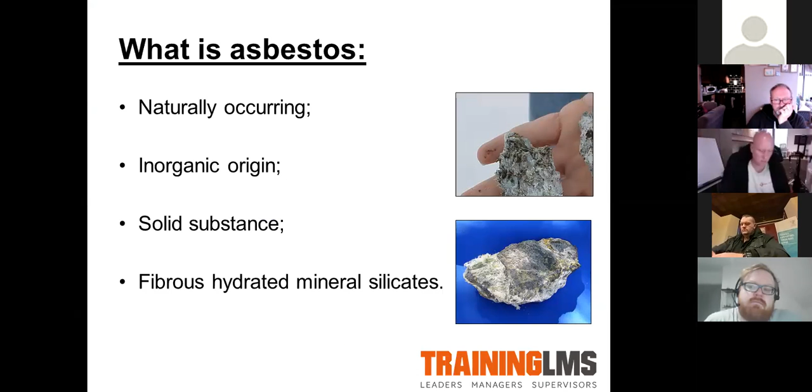So just to make a start, what is asbestos? Asbestos is basically a naturally occurring mineral that forms in riverbeds, etc., and over years of metamorphic pressure turns into a rock. So in the rock, in the veins of the rock, as we call it, this is where the asbestos forms. There are 2 different types of fiber. Again, we'll look at those in a wee second.

But as I said, it forms in rock and it's then extracted from that rock and made into the various products that we know of today. So they say there's anywhere between 3,500 and 4,000 products that it was made into. So again, we're going to look at a lot of the familiar ones.

You'll see a few unfamiliar ones as we go through the session. So these are just a few photos of basically the asbestos forming in its rock. Okay, so its definition by Google, one second, I'll just move this camera. So it's a heat-resistant fibrous silicate mineral that can be woven into fabrics used in fire-resistant and insulating materials. So two of the key words there would be fire-resistant and insulating, two of its key properties. We will again look at the properties in a second or so.

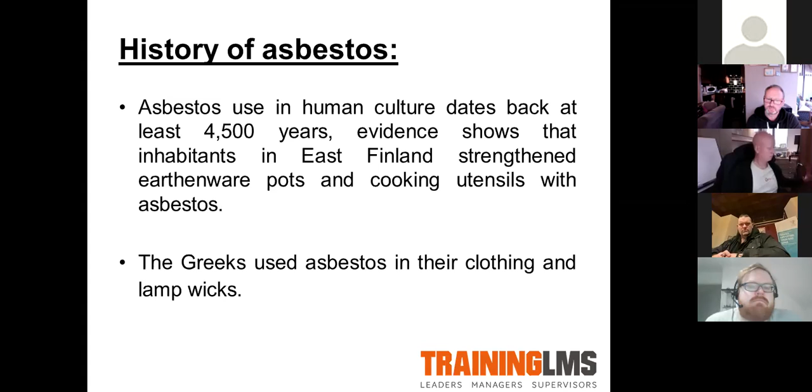A brief history, how it was used, etc. It was used by the Finnish. They were using it 4,500 years ago to strengthen pots and cooking utensils. So again, one of the key features of asbestos is strength, tensile strength. So the Finnish were using it for their pots, cooking utensils, etc. The Greeks used it in their clothing and lamp wicks. In medieval times, it was used extensively as insulation in suits of armor.

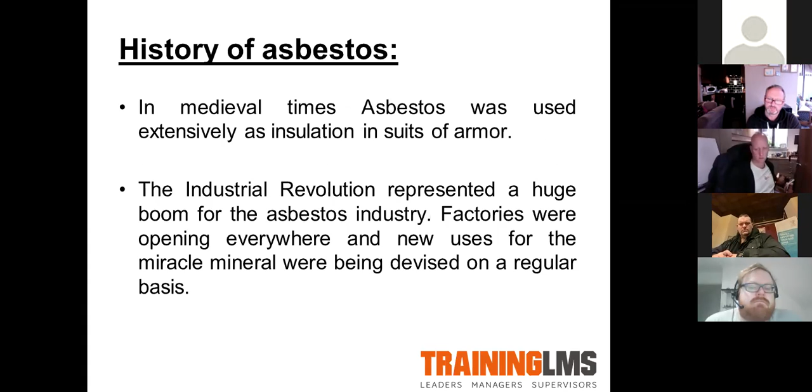And the Industrial Revolution represented a huge boom for the industry. Factories were opening everywhere, and new uses for the miracle mineral were being devised on a regular basis. So as we said, up to 3,500 to 4,000 products it was made into. It wasn't until the late 1880s that asbestos was mined commercially in Canada, closely followed by Russia and Africa. So three of the main countries responsible for taking it out of the ground were the Canadians, the Russians, and Africa. Russians are still taking it out of the ground. We'll briefly touch on that in a wee second as well.

So the Russians are still one of the major operations in taking chrysotile white asbestos out of the ground in 2020. In the UK, the commercial use of asbestos began around the end of the 19th century, and it increased rapidly after World War II. So obviously there was a lot of destruction, etc. after the war. It was a readily available mineral product, and it was cheap. Cheap being probably the key word as to why it was used. It was readily available and it was very, very cheap.

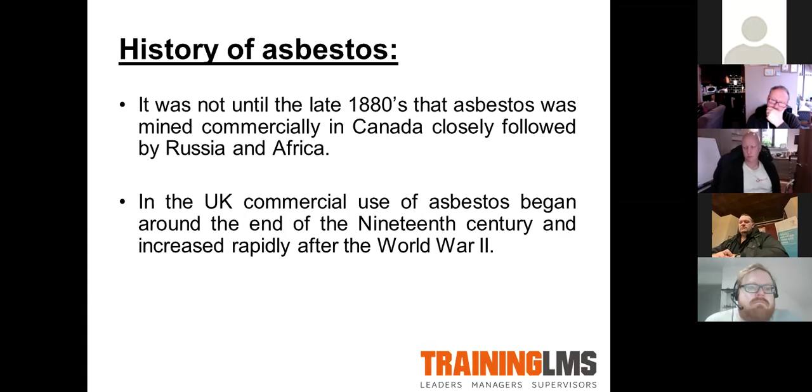The greatest use of asbestos was from around the 50s to the 80s, especially in system-built housing. So any of you guys that are in Northern Ireland Housing Executive, etc., the guys over in England, social housing. A lot of those houses were constructed using asbestos. And today in 2020, even when we're out surveying, there is still a hell of a lot of it in those properties. A lot of people seem to think that in 2020 now, the majority of it is gone. Definitely not. There's still a lot of it out there being managed, removed, etc. on a daily basis.

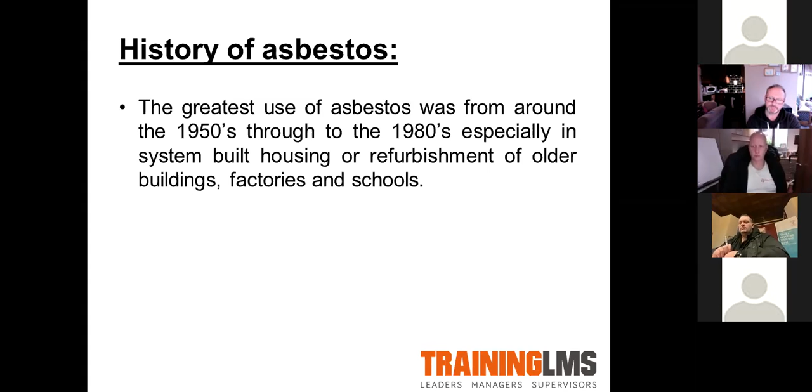Other places it was likely to be installed would have been older buildings, factories and schools. Any government funded building, there's usually a lot of it in there. Yeah, and older factories and schools. So I'm sure you have had some experience in any of those areas with regards to asbestos. So in terms of time frame, that 30-year period of the 50s through to the 80s was when the majority of it was installed. In 85 and 99, which we'll touch on in a while, there were bans brought in in the UK, so the installation of it severely reduced. So basically any building, factory, school, whatever you're working in that was constructed between that period, there's a strong likelihood that asbestos was used.

So here are three types: crocidolite, the top one, amosite and chrysotile. So we'll start with crocidolite. It is our blue type. Again, you don't need to write any of this down yet. If you want, you can write it down in a second. There was 50,000 tons of crocidolite installed, mainly as thermal and sprayed insulations. So sprayed insulations to undersides of roofs, etc., factories, pipe lagging, all of that kind of stuff.

500,000 tons of amosite, which was our brown asbestos, mainly as insulating board, so AIB, thermal and also sprayed insulations. As you can see, there's a significantly larger amount of chrysotile installed, so it would have been the most popular type of asbestos installed in the UK. So you can see 2.7 million tons of it, mainly in cement products, the likes of your roof sheets, your gutters, your downpipes, all of those things. So large kind of areas to fill, hence why there was a lot more of it used. So there was 2.7 million tons of chrysotile.

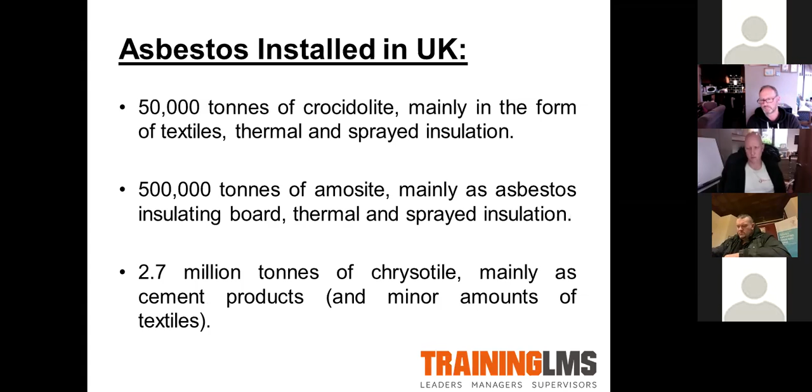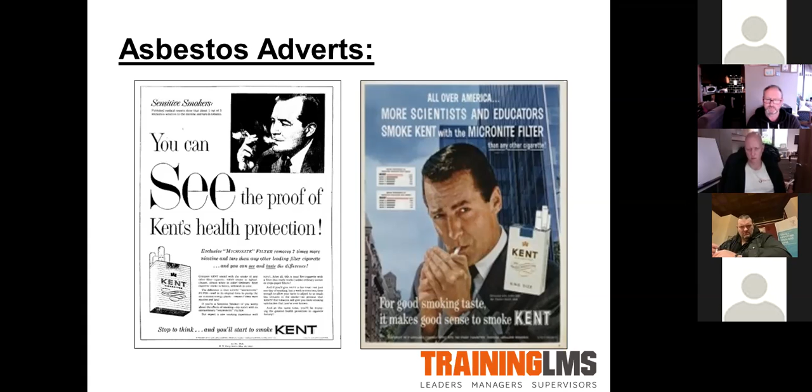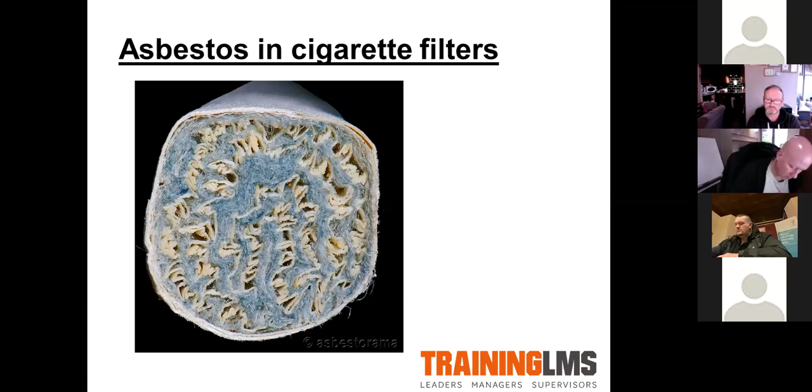So this was Kent Cigarettes, who promoted their cigarette as a healthier cigarette to smoke. The reason they stated that was because of this. In their filter, they basically used blue asbestos, the most dangerous of the three, Crocidolite, as a filtering agent. That filtering agent was there to take out your bad tar, nicotine, whatever other dirty chemicals are in cigarettes. So little did they know they were basically breathing in a class 1 carcinogen in blue asbestos. So thankfully those aren't around today.

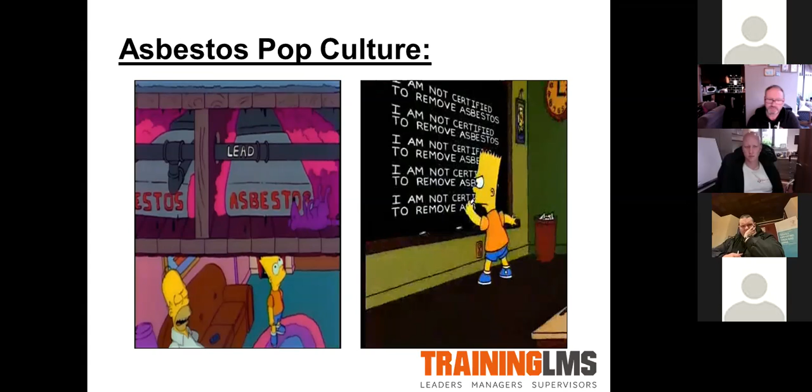So the three main types of asbestos, guys, if you want to write this down, this is probably one of the most important things you can take away, the names and the types. So feel free to make notes if you want, or you don't have to, obviously. Number one is Chrysotile. So that is our white asbestos. That is the one that we referred to at the start as being the most popular, the most likely that you're going to come up against.

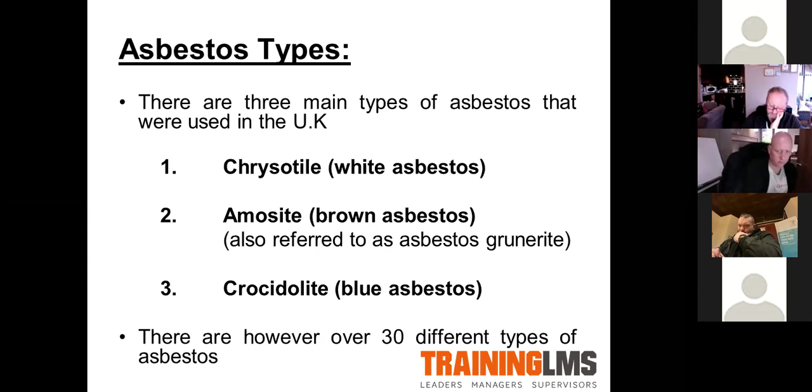Chrysotile also with the likes of your roof sheets. I know a lot of you guys are contractors, so I'm sure you've come up against corrugated roof sheets before, gutters, downpipes. This would be the main type of asbestos in those.

The reason being, it's an amphibole fiber, so therefore it's a straight fiber like our amosite. The difference with our crocidolite, and hence why it is the most dangerous of the three, is due to its makeup. I can maybe show you in a drawing, apologies for my drawing. So I kind of hold it up like so. So straight fibers, and on the end of them they have got barbs. So think of it nearly like a fishing hook.

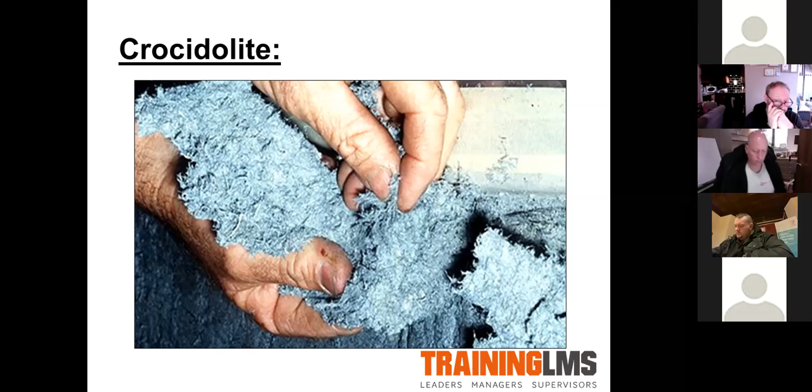When those are breathed in, they're basically clamping on to the lining of your lungs and the inside of your lungs, and it's virtually impossible for your body to expel them. So in terms of risk, that is why our crocidolite is considered the most dangerous. It is usually highly concentrated in its products, and with the makeup of that fiber, it's very, very dangerous once inhaled.

So moving on to our properties. We touched on a few at the start. We talked about fire resistance. We also talked about cost. So the main reason why it was used, guys, was thermal insulation. It was really good for thermal insulation. It's stable at high temperatures, used a lot of the time for fire protection. Also considered a good electrical insulator. It's moisture retardant. It was resistant to chemical attack. Does not degrade easily. It's got good acoustic properties, and it also had frictional resistance.

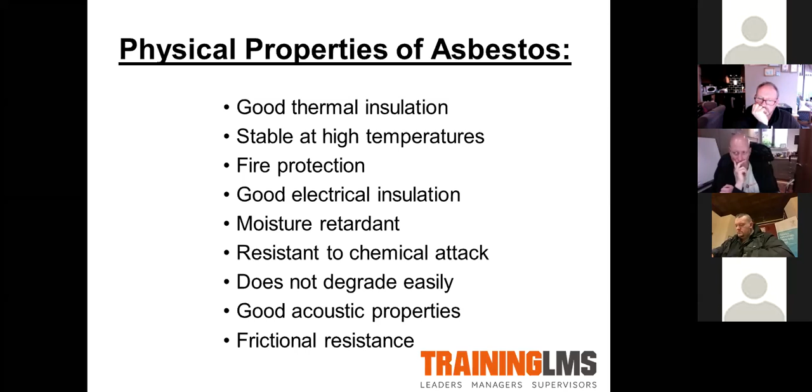So a lot of properties there, a lot of things that it was useful for. Hence why it used to be called the miracle mineral. Basically, it ticked a lot of boxes in terms of properties. One that hasn't appeared on that, and I've already touched on it, was cost. So like most things, even today in 2020, a lot of things come down to cost. So that would have been predominantly the main reason. But in terms of actual physical properties, these were why it was used.

So ban dates, guys, we touched briefly on that as we were introducing. So our chrysotile was banned in 1999. The final ban date for chrysotile use within the UK was 1999. That was the last time that you could install asbestos. The amosite and crocidolite were banned first, so you can see 14 years before chrysotile. Due to risk, they prohibited the use of amosite and crocidolite first. So in 1985, you could no longer use that. Any property constructed between 85 and 99, in theory, should not have any of those installed.

Obviously, after 1999, there should be no asbestos installed. There are some exceptions, guys. Just pay attention if you get a property that was constructed in 2000. Be sure to check that there is no asbestos in those buildings. The reason being, once it was banned in 1999, the government basically gave a one year grace period to get rid of all the previous stock that contractors had. So the odd, very, very small amount, the odd year 2000 property could have asbestos. But if you're ever asked when asbestos was banned, it was prohibited in 1999.

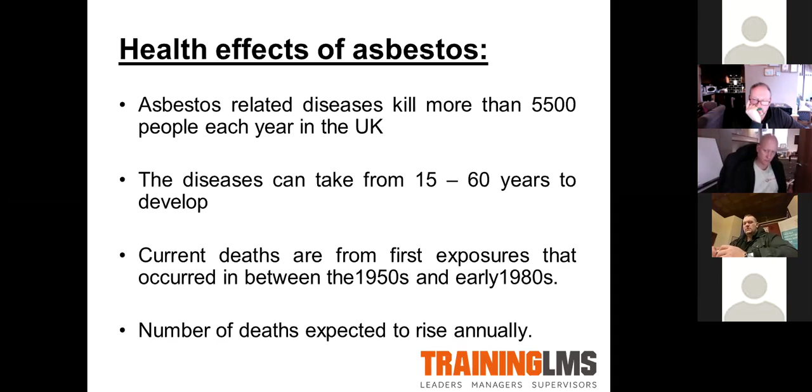So up to 2060, there's potentially going to be a rise of deaths. Hopefully, as we get towards that date, that number will start to come down, but there is expected to be an annual rise up until that date.

So who is at risk now? I'm sure you guys all come from different kinds of industries. Demo workers, construction workers, electricians, plumbers, gas fitters, plasterers, roofers. Basically what we're trying to say, anybody that is potentially going to disturb the fabric of a building. So I'm sure you guys all fall into one of those categories.

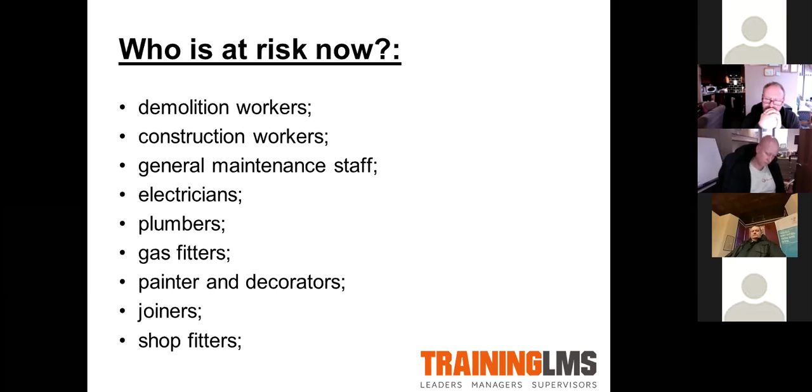Personally, I would say plumbers and electricians are probably most at risk, considering they're around boards, they're around pipework a lot of the time, they're in boiler rooms, they're in roof voids, etc. So in terms of risk, probably plumbers and electricians are high up on that list. But yeah, pretty much anybody that's potentially going to disturb the fabric of that building.

So asbestos fibers are a particular problem because of three things. We cannot with our eyes see an asbestos fiber floating around in the air. So the only way of detecting that is through regular air monitoring. So companies can go out with air monitoring pumps. They basically install pumps around your work area to ensure that that fiber is not spreading out of your controlled area.

The second one is the ability of fibers to split into finer fibers. So the ability of an asbestos fiber, if we say that's our asbestos fiber, it's always going to split down this way. So one fiber can potentially become 2, 4, 8, etc., and they have the ability to spread. So that's another problem we have with it.

And the third problem is its resistance to chemical attack. So once that is inhaled into your respiratory system, the chemicals within the body trying to dislodge those fibers are basically worthless, and that fiber will remain lodged in your body. So a lot of people will ask, is there anything you can do once it's inhaled? Unfortunately not. Once it's in there, it's basically lodged, and there's no way for the body to get rid of it.

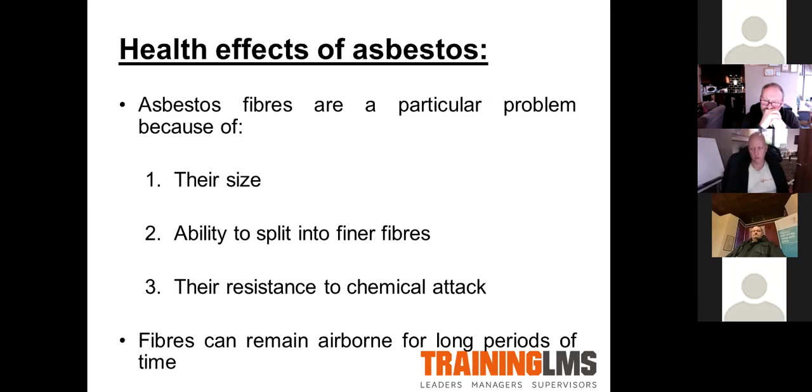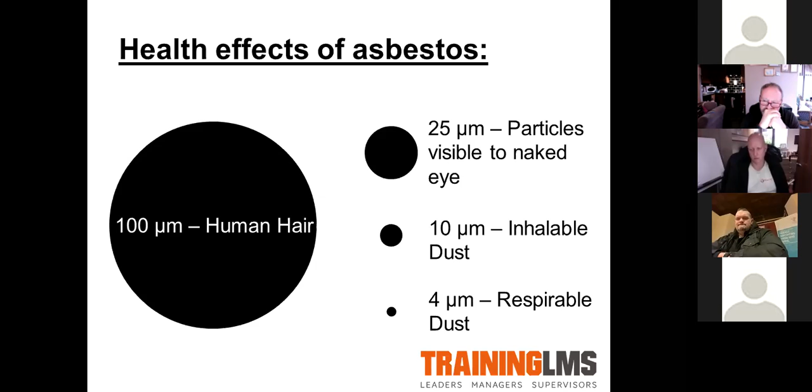So to give you an idea of how small this stuff is, a human hair, we say, is anywhere in and around 100 microns in size. So you're talking fractions of centimeters here. So to visualize that, respirable dust, which asbestos fiber comes into, is 4 microns in size. So basically there's no way of us detecting it in the air without air monitoring.

So if you're exposed to the likes of an AIB board that's broken or smashed, or sprayed insulation, versus the likes of a small piece of asbestos cement broken, there's quite a difference in terms of risk and how likely you are to pick up a disease from that. Obviously, with the licensable products, there's more concentration of asbestos, and usually the brown and the blue, the more dangerous type. So therefore, the likelihood of you picking up one of those diseases is a lot faster.

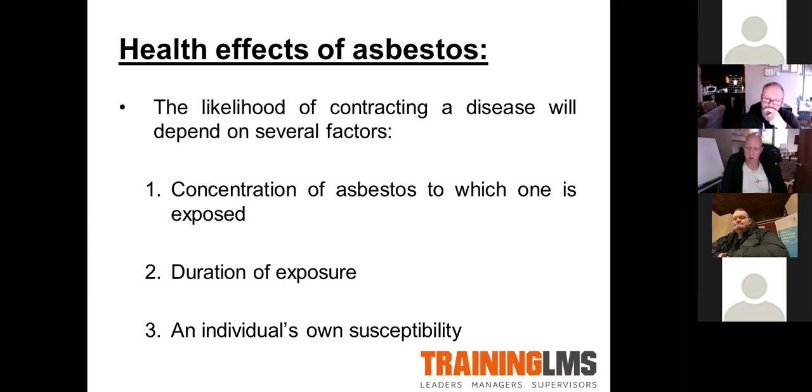The duration of exposure, so how often are you being exposed? Some people could be going into a workplace every day with asbestos in it. They don't realize that they're being exposed to a small amount every day. So that could factor in if you're being exposed on a daily basis, maybe every other day, versus maybe once a month. And then your individual immune system and body will also come into effect. So those 3 things combined, guys, will determine how quick you end up getting one of these diseases.

So apologies, this is kind of overlapped. So on the left-hand side, you can see the lungs. We have our pleura, which is the lining around the lungs. It will get affected and will eventually lead to a disease called pleural plaques, which we'll look at in a second. The other issue we have is lung cancers, so tumors growing in the lungs.

And as you can see at the bottom on the left-hand side is our alveoli. So that is responsible for our gas exchange, where our oxygen and carbon dioxide are exchanged to give us energy. Sorry about this overlapping picture, by the way, guys; on the right-hand side, you can see a blown up version of the alveoli.

As you can see at the top, scar tissue is forming due to asbestos fiber being lodged in there. The knock-on effect will be lack of oxygen getting pumped around the body. Okay, so that's just a brief overview visually.

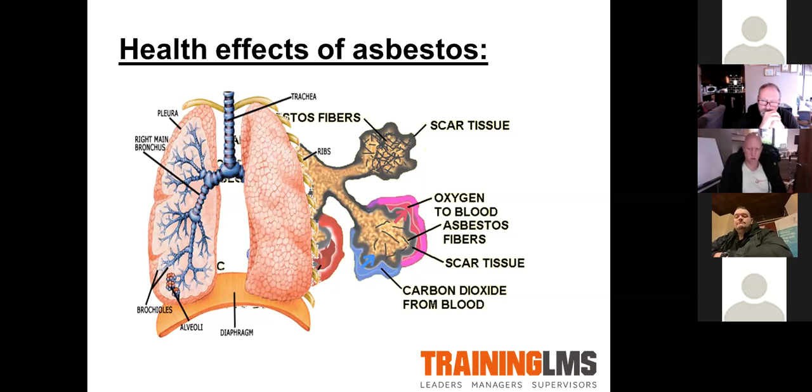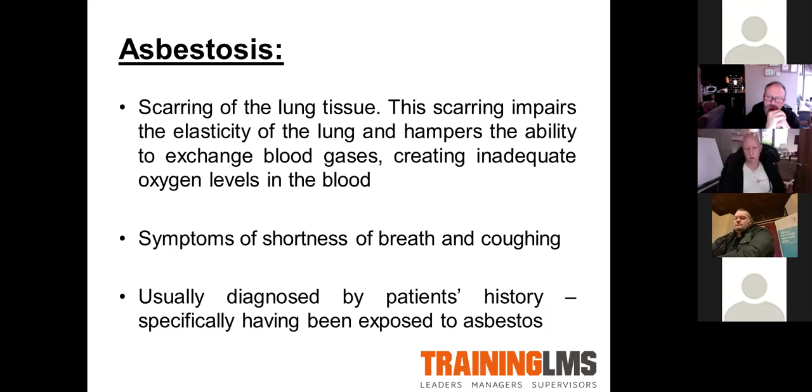So asbestosis, we will look at first. So this is to do with scarring of the lung tissue. This scarring impairs the elasticity, so essentially the stretchiness of those lungs, and hampers the ability to exchange blood gases, therefore creating inadequate oxygen levels within the blood. Symptoms will be shortness of breath and coughing. It's usually diagnosed by a patient's history, specifically having been exposed to asbestos.

So as you can see, here is a scan of a set of lungs with asbestosis. On the left-hand side, we've got a healthy functioning lung. On the right-hand side, we basically have this whole core section of the bottom of the lung severely restricted. That is down to the elasticity, so essentially that stretchiness we talked about, and the lack of oxygen being pumped around that lung. So that is what an asbestosis case will look like.

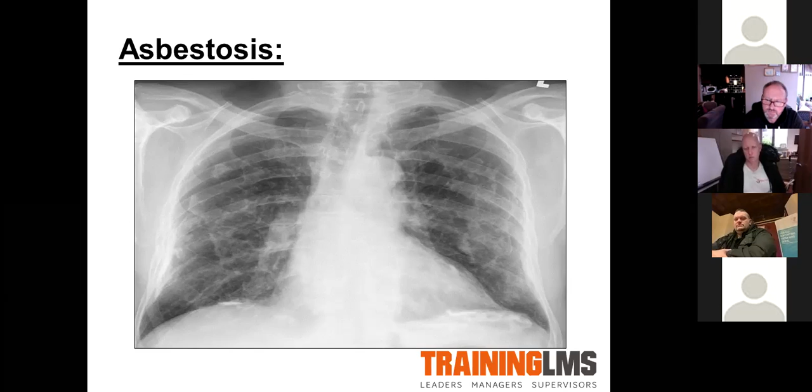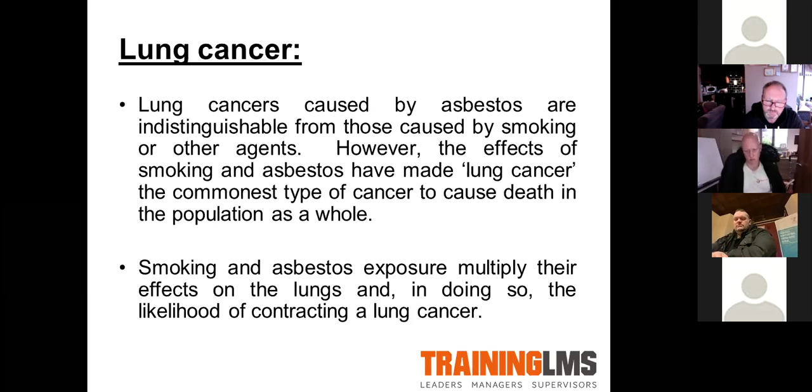Lung cancer. Lung cancers caused by asbestos are indistinguishable from those caused by smoking or other agents. However, the effects of smoking and asbestos have made lung cancer the most common type of cancer to cause death in the population as a whole. Smoking and asbestos exposure multiply the effects on the lungs, and in doing so, the likelihood of contracting a lung cancer.

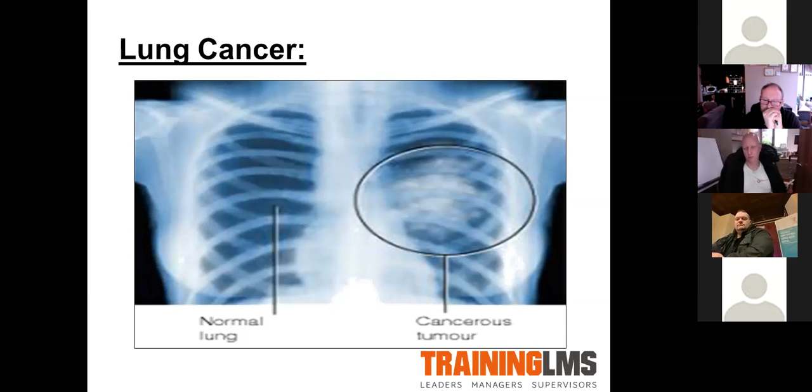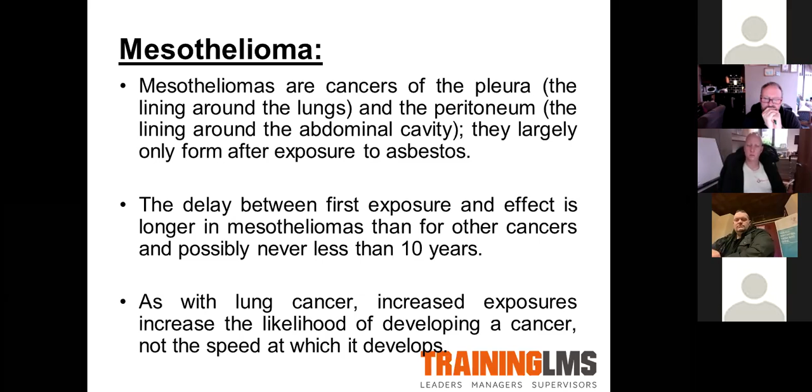Okay, so apologies guys, pleural plaques. I will just talk through pleural plaques. For some reason it's not on this slideshow. So pleural plaques is our non-fatal disease. It's the fourth of our diseases; the 3 we've looked at there are fatal. Pleural plaques is, unfortunately, and I'm sure you've heard this word a lot in the last 7 or 8 months, asymptomatic. Asymptomatic, as most of you probably know by this stage, is somebody that can have that disease but is showing no symptoms at all.

So with pleural plaques, it's an attack on the pleura, the same as this. Basically fiber will get lodged. There are no symptoms, so you're not going to get your tight chest, you're not going to get your lack of oxygen, etc. Unfortunately, with that one, you could go and get a scan, say of your chest or your back, for another issue, and it could be detected in there. Calcified pleural plaques basically calcify around the outside of your lungs.

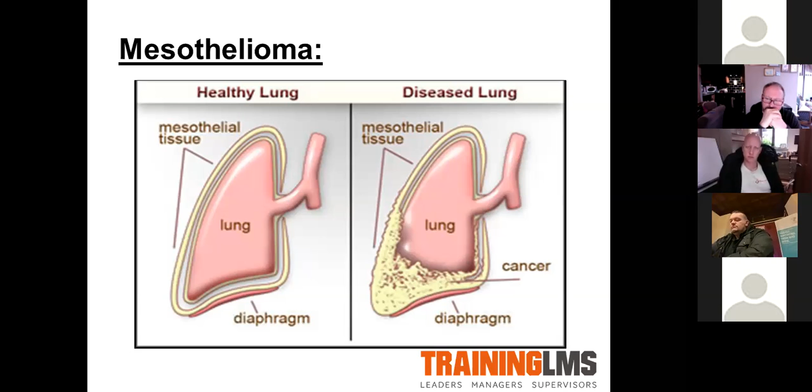Okay, so that's our 4 diseases, guys. We moved really quick through that. I'm kind of paranoid about time here, so we're 30 minutes in. So again, if there are any issues or any questions on any of that health stuff, I have kind of winged through it. Feel free to drop them into the chat box and we'll go over those at the end.

So legislation. We in the north of Ireland have our Health and Safety at Work Order. That was formed in 78. In England, correct me if I'm wrong, I think it's 74. So as we all know, the Health and Safety at Work Act is basically our law in the workplace in the UK. It's the set of laws which all workplaces need to follow.

Below that, just before we get to the regulations, we have our approved codes of practice. Our approved codes of practice are not law, they're basically guidance to adhere to health and safety at work. Below that, we have all our sets of regulations. I'm sure all you guys are working out on sites doing various things. Every industry will have its set of regulations, whether it's scaffolding, working at height regulations, everything down to manual handling regulations. I'm sure if there are electricians, sparks in there, you're all going to have your sets of rules

that we must follow. So in the asbestos industry, we have what is called CAR 2012, the Control of Asbestos Regulations 2012. That's basically our set of rules within our industry which we must follow. So we'll have a quick look at those. And just move this screen. These regulations require employers to protect employees and anyone else who may be affected by asbestos. The employer must reduce the risk of exposure, and it is up to all employees to cooperate.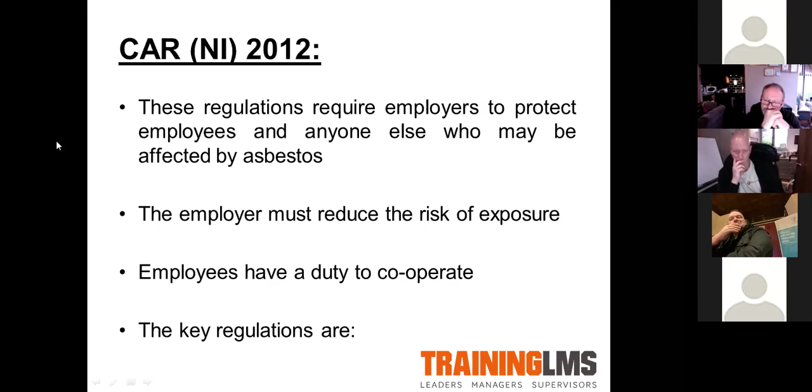Okay, so we're going to look at the key regulations. There are over 20 odd regulations, guys, but we've summarized them into the most important ones that are going to be applicable to you. So, Regulation 4 is the duty to manage asbestos in non-domestic premises. These are aimed at owners and occupiers of non-domestic premises who have maintenance and repair responsibilities for those premises. They have a duty to assess them for the presence of asbestos and the condition of that asbestos.

So really briefly, guys, we'll take Tesco's Banbridge as an example. In Tesco's Banbridge, the person responsible for maintenance and repair is usually the health and safety person or the premises manager. If they have asbestos in that building, once a year they must get a management survey done. That will check the condition of the asbestos, and the asbestos surveying company will give you recommended actions, whether it needs removed, encapsulated, or repaired, or the one thing clients want to hear, that everything is in good condition and to come back in a year's time and check it. So that's a management survey.

A refurb survey must be done for any refurbishment works that could potentially affect the asbestos. If we go back to Tesco's, if they were getting a new air conditioning system installed, for example, all the areas that are going to be affected, drilled through, cut, etc., must be checked for asbestos. So that's our second survey, our refurb survey. Our third survey is our demo survey. If a building is being demolished, a thorough, intensive demolition survey must be done to find all the hidden asbestos that isn't visible to the eye, and that must be removed before the demo guys can come in and drop the building. So that's our 3 surveys.

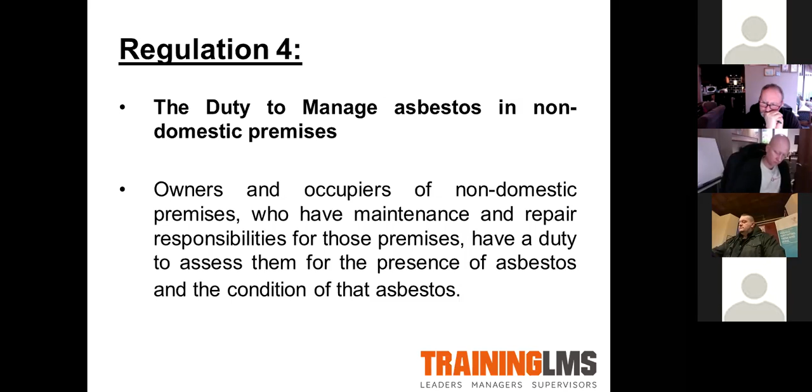So a management survey must be done every 12 months. A refurb survey must be done for any works that could disturb the fabric of the building. And the demo survey must be done before the building gets demolished. Right, we're going to talk briefly on plans of work. Some people will ask, must a plan of work be done for any asbestos work? The simple answer, guys, is yes. Every time you're potentially going to be disturbing, cutting, or drilling through asbestos, there must be a RAMS done before.

A RAMS is a risk assessment, which must be done prior to the work, and that risk assessment makes up your plan of work. So everything from who's going to be involved, where the actual work is, what controls you're putting in place for others working in the close vicinity, what the operatives are going to be wearing, whether it's a half mask or a full face mask, the suits, and if it's a licensable job, where the shower unit is located. So it's a pretty important document that must be followed from start to finish.

That will usually end with where the waste is being stored on site and where it's going to be transported to dispose of that waste. All of those details must be prepared in advance, before work starts. Employees are to be aware of and follow its content. So all of you guys are going to be familiar with plans of work.

It's ensuring that the employees that are actually going to be doing the physical labor must be aware of its content and basically understand what it's going to be doing on that specific job.

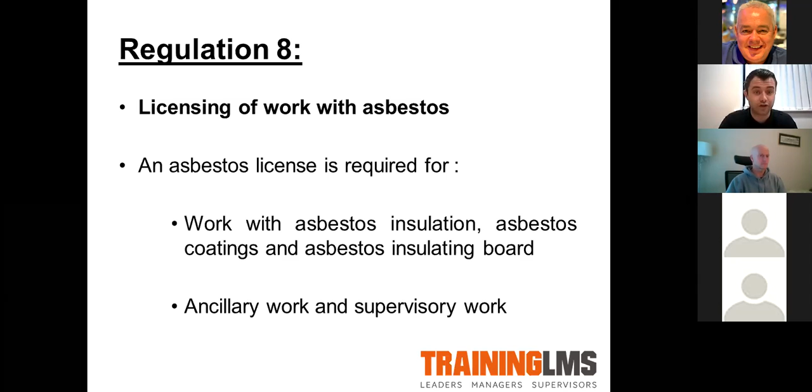You need to meet with the HSE and basically have a meeting with them, go through everything, all your standard working procedures, etc. And then if you're successful, they will grant you with a license. That license is usually 1 year. If in that year everything goes as planned, they will usually grant you a 3-year license to remove that asbestos. So that is everything to do with licensing. Remember, if you're ever considering doing licensable work, ensure that you have your license prior to doing so.

Right, Regulation 10 is all to do with information, instruction, and training. So hence why you're sitting here today, listen to me. So every employer must ensure that information, instruction, and training is given to all employees who are liable to be exposed to asbestos. So remember, guys, what we're doing this morning is asbestos awareness. So this isn't going to allow you to go out and remove asbestos. You need specific training to do that. So this is an awareness.

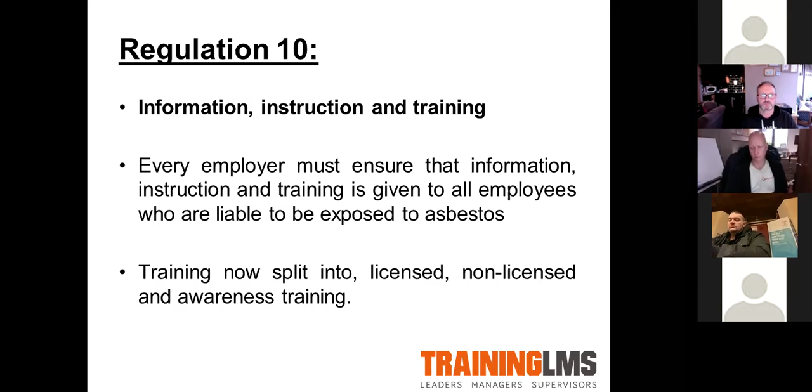So basically, it's to show you what it is, where it came from, the importance of doing things right, following regulations, etc. So if you ever decided to remove asbestos, you must do one of the following courses. So it's a licensed course. That's usually a 3-day course. Our non-licensed is a 1-day course. We go through all of the guidance and approved codes of practice. There's practical elements, how to bag waste. There's how to personally decontaminate, and all of the modules included in that will allow you to basically remove non-licensed asbestos by the book. And then the last one is our awareness of what we're doing this morning, basically.

Regulation 11, very important one, is the prevention or reduction of exposure to asbestos. The most important thing when we're removing asbestos is to ensure that others are not being affected or exposed to that asbestos during that works. So the only way of doing that and proving to maybe a client is through air monitoring. So importance of getting air monitoring checked, basically evidence for you to pass on to your client that nobody has been exposed above the control limits, etc.

Choosing the suitable work methods is highly, highly important within asbestos works. Correct use of RPE and PPE. So I briefly touched on it. We have 2 types of masks. We have our full face respirators with an assigned protection factor of 40, usually used within the licensable jobs, so the more dangerous jobs. And then we have a half mask with an assigned protection factor of 20. That will usually be used for non-licensed and notifiable non-licensed works.

There are alternatives with half masks. You can have a half mask reusable rubber style mask that can obviously be wiped down and reused again, or single use disposable masks. A lot of people kind of assume that you just put a mask on and it works. I can assure you that that's not the case. I also do some face fitting here as well. So stressing the importance of choosing the right mask, making sure it fits correctly. Everybody assumes the universal mask will fit everybody.

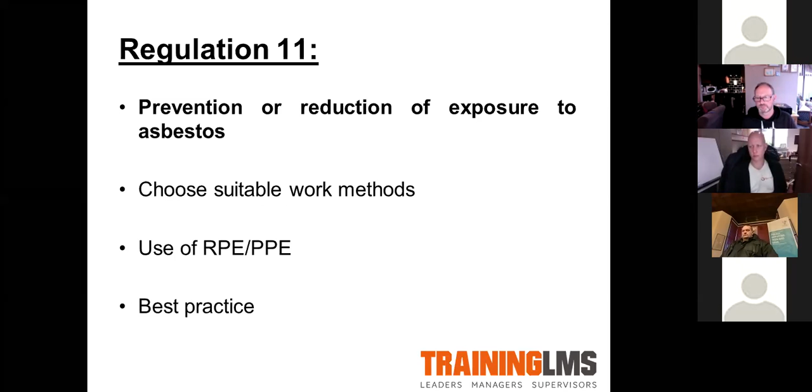Not the case. So basically going on to face fitting, ensuring that your operatives that are wearing a mask have been fitted correctly and have a certificate to prove that. So that's something, again, if you're ever considering doing asbestos works, must be done prior to you starting those works, all of your guys face fitted.

Regulation 16 is the duty to prevent or reduce the spread of asbestos. So one thing the HSE like to crack the whip essentially on is ensuring that from your workplace you're not spreading asbestos elsewhere. So that's what we're talking about, the likes of your personal decontamination, making sure you're bagging the waste close to the source and not bagging it at the other end of the site, etc. So they're all things that you would touch on a non-licensed or a licensed course.

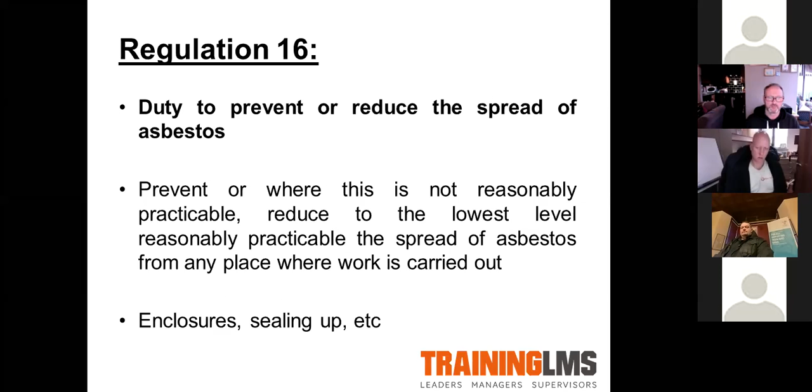Enclosures, how to seal enclosures up at certain points in the day, etc. Ensuring that the waste skip is sealed at all times. So basically, that's the one that the HSE insists that you work very, very hard on not spreading it elsewhere. So the approved codes of practice, so they were all regulations we've just looked at. These next ones, guys, are approved codes of practice.

So there is a book that you can buy. It's called the HSE Asbestos Essentials. You can also download that from the HSE website. If you guys are likely going to be doing any type of asbestos works, I'd highly recommend for you to go online and have a look at it.

If you go to the HSE website and type in HSE Asbestos Essentials, that will bring you to, it's basically your approved codes of practice on how to remove your non-licensed items. So the likes of your roof sheets, the likes of your gutters, your downpipes, etc. Obviously with a bit of training and this guidance, it's an easy way for you and operatives to ensure that everything is being done by the book.

So highly recommend you download that or even buy a copy for the office. It's a good source of information to have to ensure that you're following all the regulations and approved codes of practice. So you'll see it here in a second. I'll just get it here. So with this one here, it's the Asbestos Essentials Task Manual, HSG 210. So any of you that are working with asbestos regularly, I would highly recommend either buy it or go online and download it. And you can print it obviously as well.

That will go through things like personal decontamination, how to bag waste, how to remove certain products like gutters, downpipes, ensuring you're doing it by the book basically. So key source of information. If you are keen, I would definitely try and get onto that one, guys.

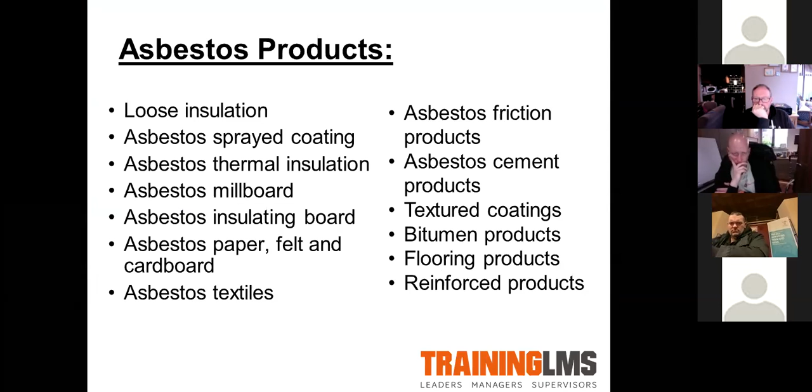Right, we're going to look at asbestos containing materials. So 15 minutes, so we're going to have to kind of rattle through this as quick as we can. So we're going to look at our most dangerous, which is our loose fill insulation. We're going to work down to our reinforced products. So in terms of risk, guys, most risk is our loose insulation. And as I said, as we come down, the risk is severely reducing, okay?

So loose fill insulation, this is typically what it looks like. It's a gray or a blue color. You will find it not very often. Usually if there's any guys in Belfast and you're working close to the docks and Newtownards Road, etc., be on the lookout around there. There's quite a few of it we would find in surveys in houses, usually in roof spaces.

The theory was guys were basically coming home from Harland and Wolff shipyard on a daily basis and taking a little handful of it home with them every day, putting it into the roof space to insulate their loft, etc. So you will occasionally find it in little random places, roof voids. But yeah, it is highly, highly unlikely you're going to come up against it, but be on the lookout for anything that basically looks very similar to your MMMF.

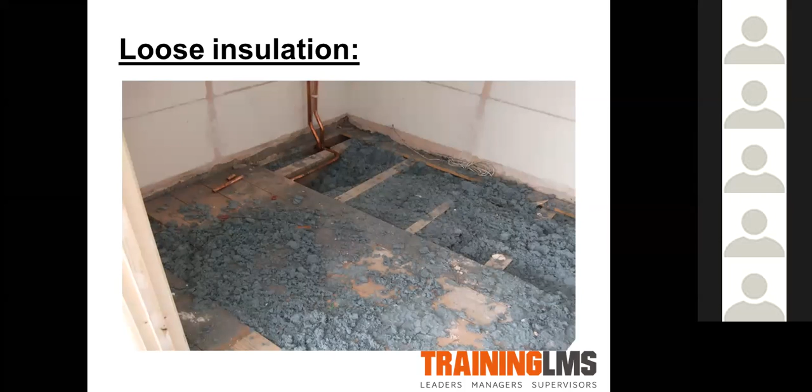It's usually in a powdery form, and it's usually a grey or a blue colour. So just be on the lookout for that, guys. Highly, highly, highly friable. There's a high concentration of asbestos within that.

Coming down, our next one is our sprayed coatings. Again, this stuff is usually applied to undersides of factory roofs, steel beams, any structural parts to a building. Famously, it was used in the Twin Towers in 9/11. All of those beams, etc., were sprayed within the Twin Towers, hence why there was a huge asbestos exposure during that tragedy in the early 2000s. So again, be on the lookout for this.

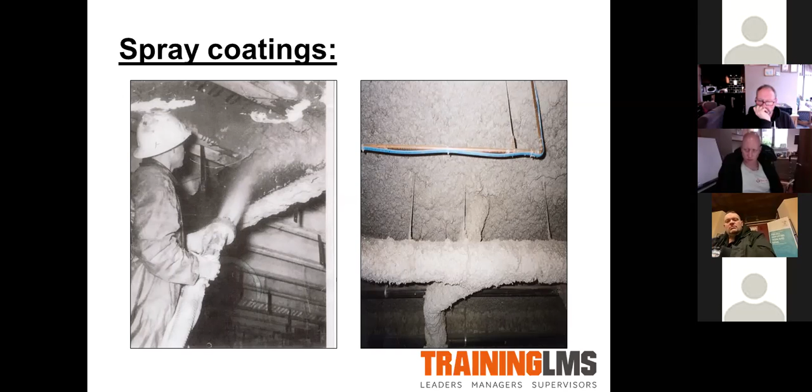It's usually fluffy in appearance. It can have a trowel finish, so it can have a smooth finish. So sometimes, guys, it looks very similar to a cement finish. So if you're ever unsure and you're potentially going to be drilling through or doing any work surrounding it, make sure you have it sampled and analysed first. So that's what it can look like. Just another photo of it, but as I said, don't be fooled by that image. Sometimes it can be trowel finished.

So thermal insulation, this is what most people will refer to as pipe lagging. As you can see, sections of pipe on the left-hand side, preformed sections clipped on around the pipe, as you can see here. On the right-hand side, not so pleasant on the eye. This was usually hand-installed thermal insulation. So what the guys were doing back in the day, they basically had a bucket of whatever calcified product they were putting onto their pipes.

They would have wrapped chicken wire around it. They would have put horsehair, and they were mixing their asbestos with the calcified products and basically hand applying it to the pipes. So again, if you're working around pipe work and boiler rooms, roof voids, etc., be careful of walls, floors, and ceilings. If you see anything that looks very dodgy looking on a wall, kind of step away and have it analysed before you do anything.

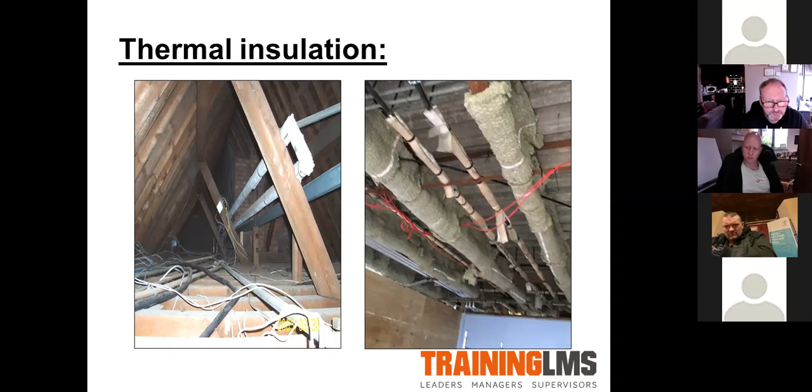So most of the time, guys, you're going to find that as a pipe lagging. You'll also find it on boilers, calorifiers, pressure vessels, etc. But the main area will be your pipes. So that's it on a larger scale, an industrial scale, large sections within a factory.

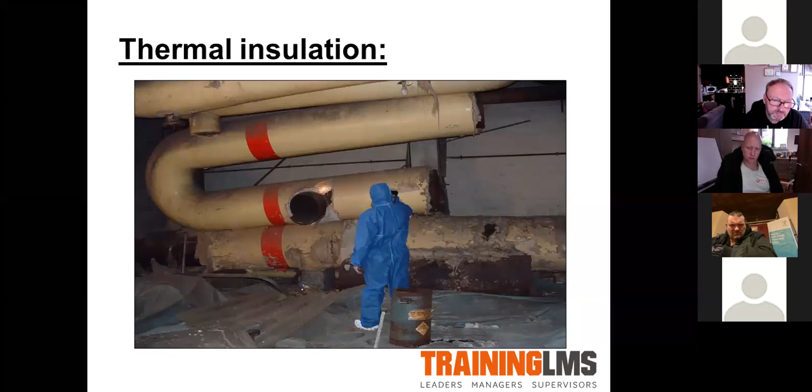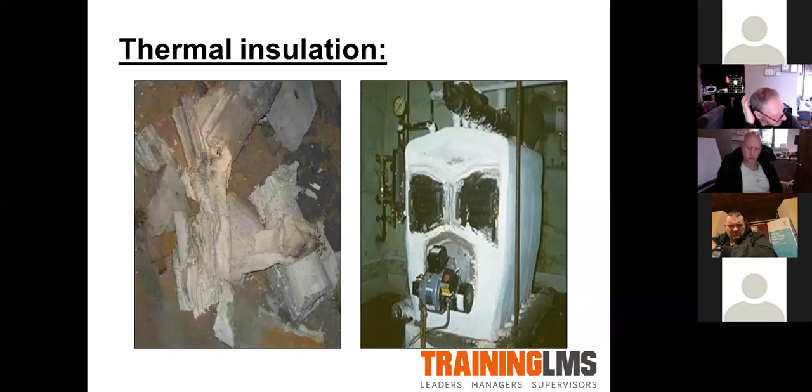Again, on the left-hand side, you can see that is debris that has fallen from a pipe, and on the right-hand side, you can see a boiler which has been painted with thermal insulation. So these are all licensable products, guys. Remember, you don't touch any of this stuff unless you are trained to do so.

Right, we're coming into our last of our licensable products. So this is our AIB. AIB is Asbestos Insulating Board. Where could you find this? The easiest way to say it, guys, is anywhere where you could potentially find a plasterboard in a building. So you think where you can find that, pretty much anywhere. This was used in the same way, pretty much as plasterboards, walls, ceilings.

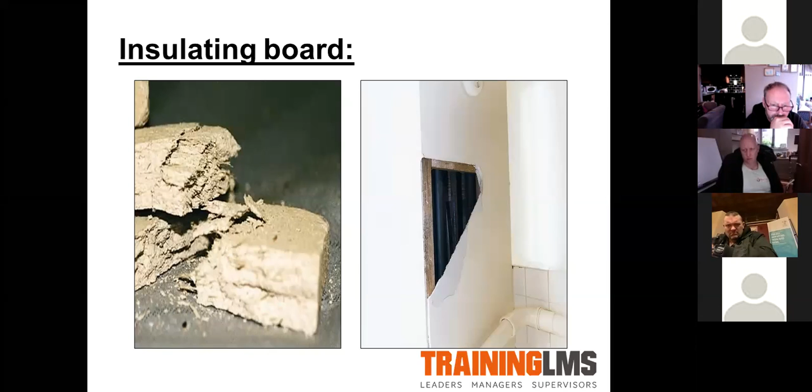You'll get canopy covers, undersides of canopies, etc. Fire break panels, you'll get them as drip trays in roof voids underneath water tanks, etc. So this one is the one that you potentially are going to come up against a lot. So just be on the lookout for any types of boards that look suspect. Remember, we want to touch at the very end on what you should do if you do come up against some of these.

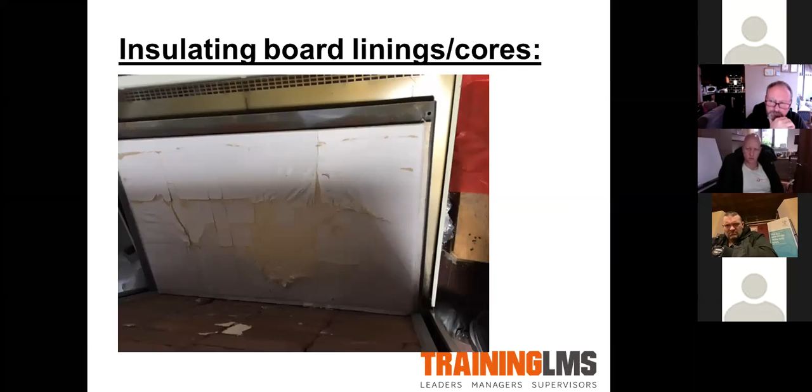Okay, coming into our middle category of notifiable non-licensed work. So remember, we said our red section was our licensed work. This middle section essentially is a non-licensed product, but potentially has been broken, disturbed, damaged, maybe a fire damaged building. So therefore it goes up a category from non-licensed, and you must notify this to the HSE before you remove it.

So asbestos paper can be found in various different places, guys. Asbestos paper you will sometimes find on the undersides of tiles, floor tiles, lino. You can also find it underneath pipe lagging, also acting for insulation purposes. The paper you would find on your tiles underneath lino, etc. in kitchens is there as a water protection, stops vapor coming through into the kitchen, etc.

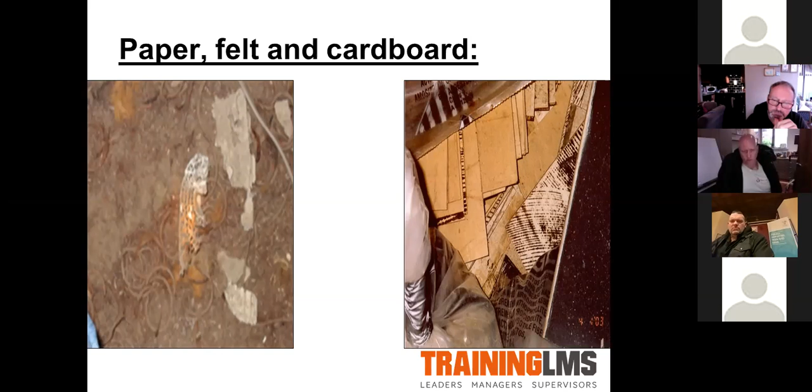So just be on the lookout for any suspect paper that's potentially on tiles, lino, pipes, etc. Just be on the lookout. And again, if you're unsure, stop works, report it, and get it sampled. Ropes and yarns, so these are mainly chrysotile based. So remember from the start, white asbestos, chrysotile. Remember we said we could weave it easily into fabric or into clothing products.

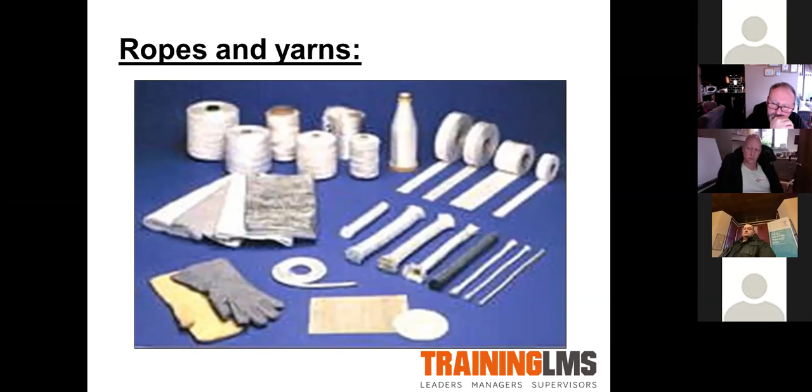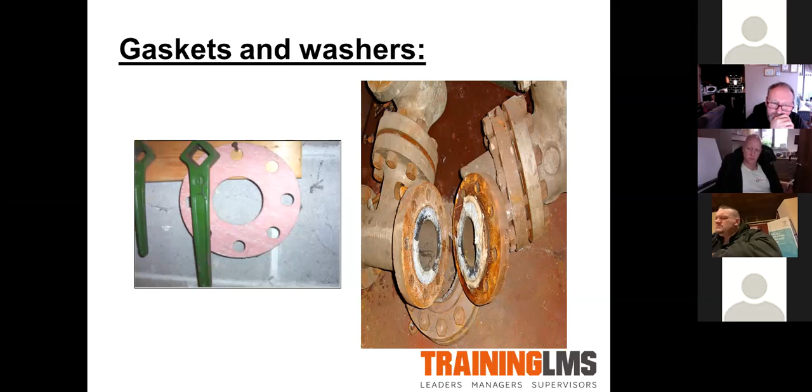Okay, gaskets and washers. Again, you're going to know where these can pop up, usually sandwiched between pieces of pipework, etc. Friction products, old brake plates and clutch plates, etc. in old vehicles, old lifts, etc. in old buildings. You would sometimes have asbestos brakes in the lifts. So again, if you're ever working in any older buildings with lifts, etc., be on the lookout for these, boys.

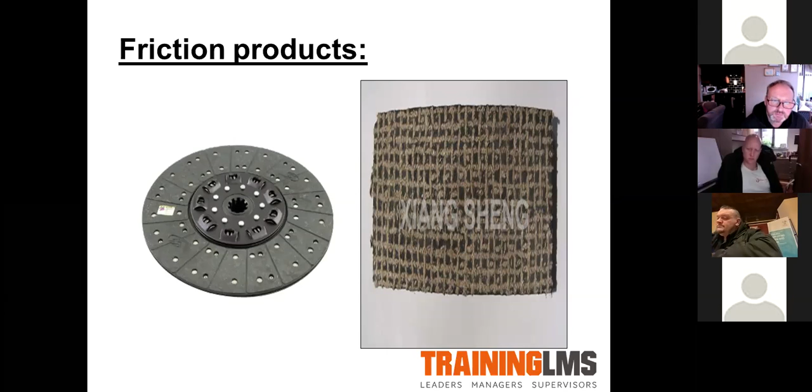Right, coming into our non-licensed category. I'm kind of conscious for time here, guys, so I'm just winging through these. So our cement profiled sheets, I'm sure at some stage you've come across these, you've seen them somewhere. Farms around the north of Ireland, you're going to see these everywhere. Farmers tend to use these. Be careful, guys, if you're going out potentially maybe looking at removing this stuff.

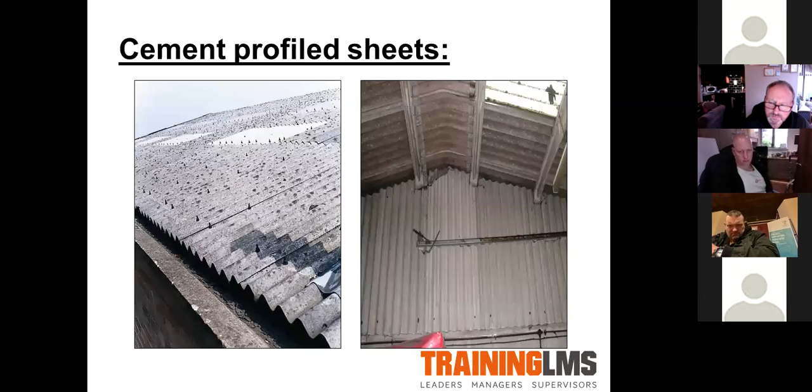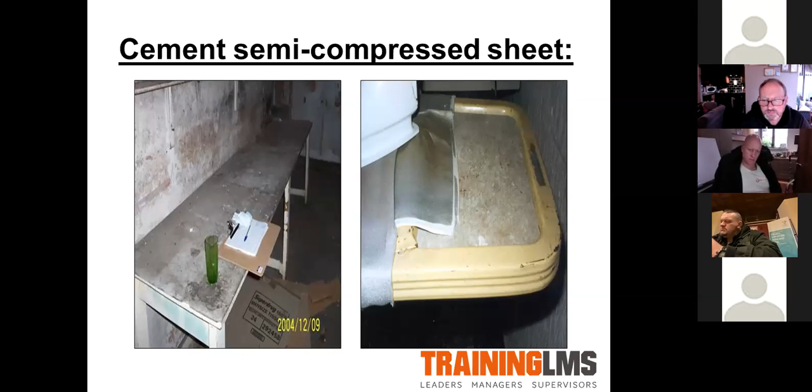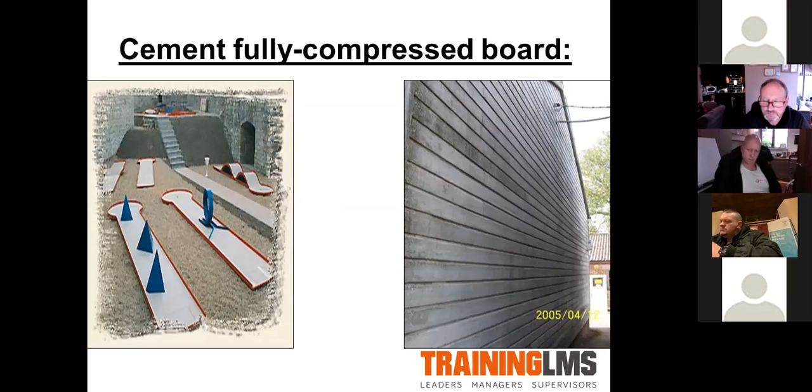Some fully compressed board, you can see some tongue and groove, etc. Cladding, not so popular in the north. England, I would say they're probably more popular over the water. Some molded products, so we can see some flues on the left hand side. Usually our asbestos cement is that battleship greyish kind of colour, so traditionally it usually looks that colour.

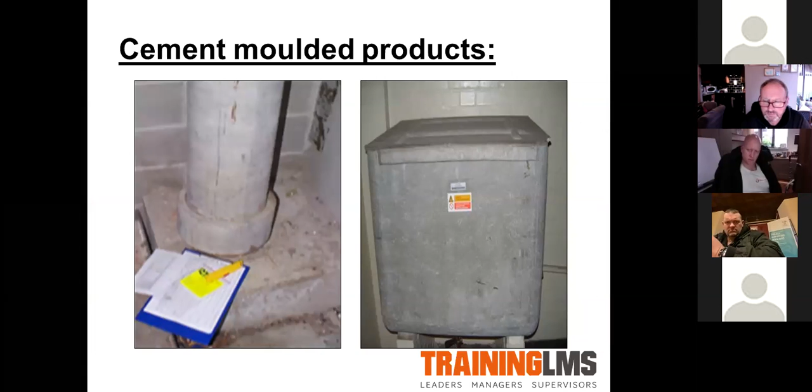Okay, moving into our bitumen products. Here you can see a flat roof with asbestos bitumen. Again, we're now towards the bottom of our work categories chart. So in terms of concentration of asbestos, it's a lot lower than the likes of our pipe lagging, etc. So a very, very small concentration bound together with a bitumen, basically, that's making it very, very impossible for that fibre to escape.

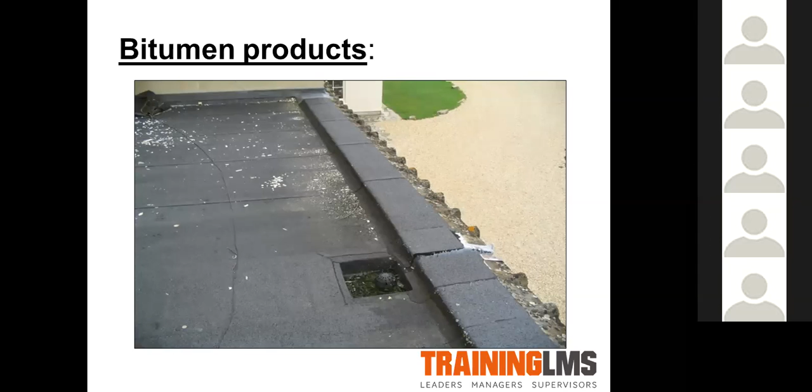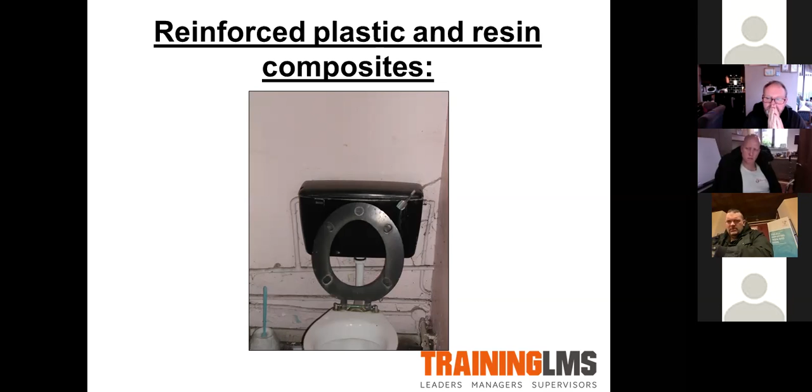Bottom of the list, guys, we have a reinforced plastic and resin composite. So virtually impossible for this asbestos fibre to escape, bound together with a heavy, thick bakelite usually, or a plastic composite. You will find these in lights, outside lights. You'll sometimes see a black trim around security lights. You'll find them in toilet cisterns, toilet seats, and it's usually that thick, heavy black plastic that it is in. Okay, so that is our products, guys.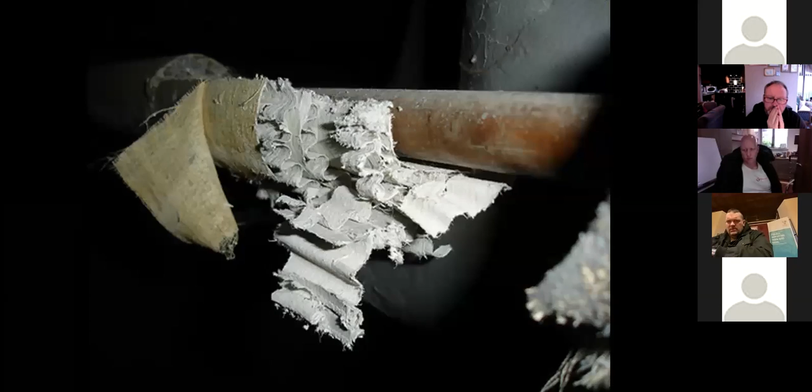I'm going to just skim through these next photos because we've only 5 minutes left, so I just need to get to what to do if something goes wrong, basically. I'm sure if Roger asked, we could send over a PDF copy of this PowerPoint for you to look through all these products. Okay, so we're just slightly running behind on time, so we'll go to our emergency procedures.

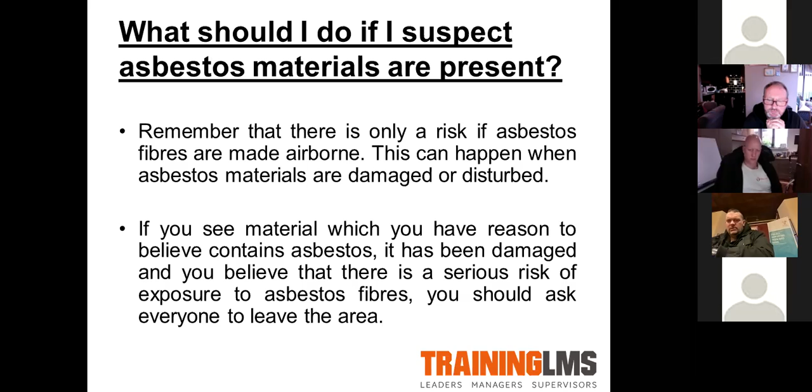So what should I do if I suspect asbestos materials are present? I've kind of touched on this a few times. Remember, there's only a risk if asbestos fibers are made airborne. This can happen when asbestos materials are damaged or disturbed. If you see a material which you have reason to believe contains asbestos, it has been damaged, and you believe there is a serious risk of exposure to fibers, you should ask everybody to leave the area. But remember not to create more of a risk to people, for example, causing a panic or leaving something in an unsafe condition.

So briefly going to look at this again. Remember, we said our licensable materials are very, very dangerous materials. And the others, in terms of risk, a lot less risk, still very dangerous, still have to be treated the same. But what we're going to say in this next statement is, remember that minor damage to some materials does not always mean that there is a serious risk or that immediate evacuation of the area is warranted. So for example, minor damage to a material securely bound in a matrix. So these are our non-licensed securely bound in a matrix materials.

So basically, to give you an example, if you were to get a piece of asbestos cement roof sheets, those corrugated sheets, and maybe a small piece fell onto a factory floor or something, if you had a small piece of cement, even that size, in terms of risk, very, very low, okay? Remember that that fiber is bound together with a cement. So evacuating the full factory because of a small piece of asbestos cement is probably uncalled for. So again, using your knowledge and understanding, obviously if you're trained to remove it, go over, wet it down, put it in an asbestos bag, have your mask on obviously, and dispose of it.

Now, on the other end of the spectrum, if you were to go into a building and there was a potential AIB roof panel and it was smashed all over the floor, that would warrant closing that door, locking it, and reporting it to somebody, whether the client or your supervisor. That must be sampled through a UKAS lab. Once that's been analysed and sampled, report it to the client, and then the client will basically follow up on getting it removed. So basically risk assess in your head, guys.

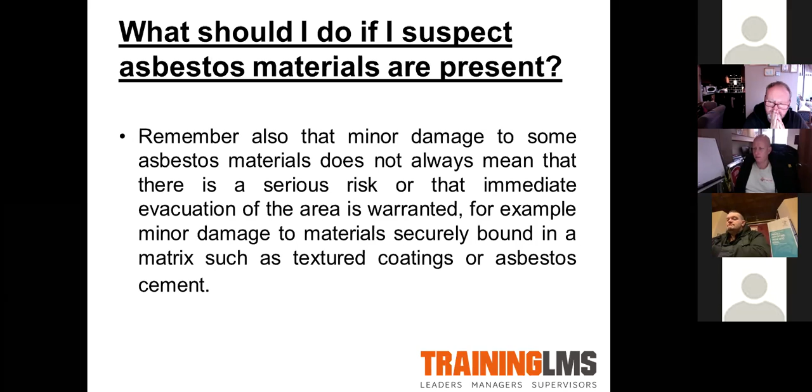I know we've went through those pretty quick, but remember the likes of your insulations, your loose fill insulation, your sprayed insulation, your AIB boards, etc. It's all of those really nasty stuff and your pipe lagging that you would be stopping, locking the area, reporting it straight away. Obviously, with your other materials, the likes of your roof sheets, cement products, bitumen, floor tiles, they still must be reported to somebody and still must be cleaned up. But in terms of evacuating the building, it's probably a bit over the top for that, okay?